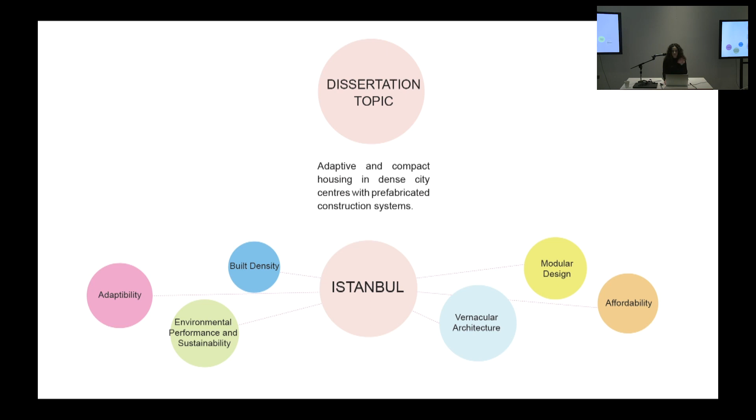Moving on to the climate, the project is located in Istanbul, Turkey. It is one of the densest cities in Turkey, close to 16 million population. Istanbul has a transitional climate between a temperate Mediterranean climate and a temperate oceanic climate, with warm to hot, moderately dry summers and cool to cold, wet winters.

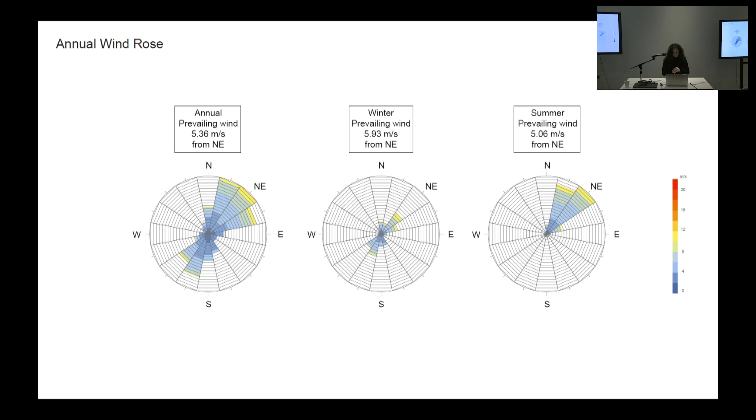Throughout the year, wind speed and direction are consistent. The dominant wind direction is northeast all year. The frequent wind velocity is about 5.3 meters per second with 25% frequency.

So this section will be summarizing the evolution from early settlements to today's housing condition, and some of the problematic aspects and what is being lost in this process. So before immigrating to Anatolia in the 11th century, Turks lived mostly a nomadic lifestyle in Middle Asia, which means that temporality was the main principle in the early settlements, and the spatial layout of the settlements had high mobility and adaptability to different uses, conditions, and occupants. So the tents were laid out separately, belonging to different units of the family and creating a central space in between.

And this converted to the vernacular timber houses. It's pretty much developed from inner space to outer space, just like the nomadic tent. And some of the important features, first of all, is, again, there's a common space where the rooms open up. This is used as a multi-purpose transitional space, and can also be interpreted as a square that connects all rooms. And wood is generally preferred for lightness, easy manufacture, and availability in the geography.

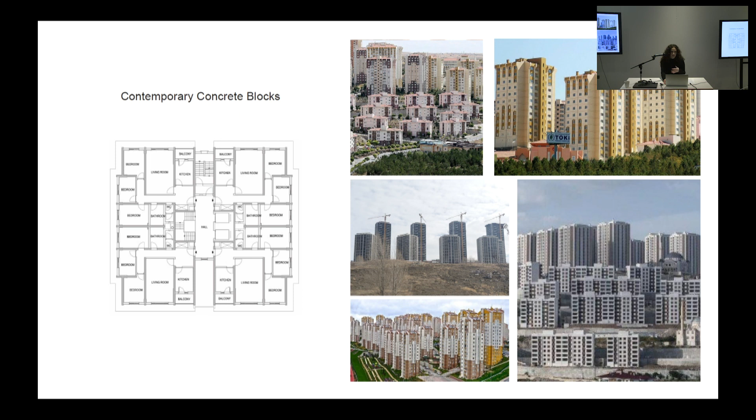So the design concept basically covers what is problematic in the current state and what can be improved. The living area mainly should come back to the center, and fewer isolated rooms should be formed. Vernacular elements should be integrated. There needs to be more attention given to the orientation and what's going on around with the obstructions, and a more compact design that also allows easy assembly and construction.

So the ideal module brings together all the main design concept and environmental concept ideas. It is very compact and only provides essential facilities. With the addition of the bay window space, it's 35 square meters. The living room and the kitchen come back to the center, and other functions surround the center. The separation between the different functions of the spaces is flexible, and for double aspect units, openings can be provided in the bathrooms for daylight.

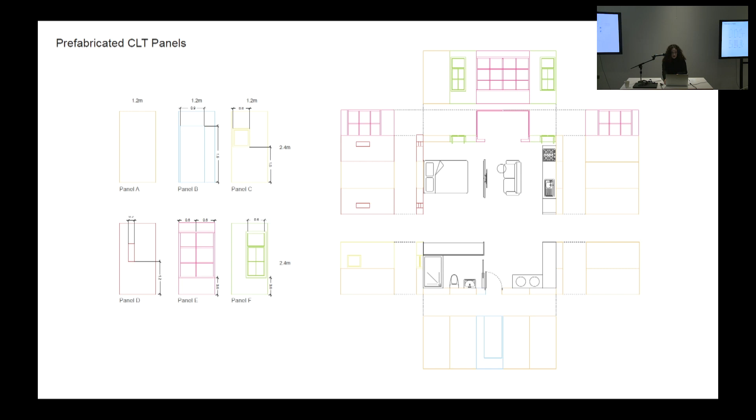The addition of the bay window is functionally quite beneficial for a very compact layout, but at the same time it can be used as multi-purpose, like a dining area, lounge area, or office. So the unit is constructed of 1.2 by 2.4 CLT panels. The different configurations of panels can provide different layouts. The main benefits of prefabricated construction are efficient, fast construction, and a high quality building envelope. And according to the transportation regulations, the module would consist of two parts, one including the bathroom and the other the living room, bedroom, and kitchen.

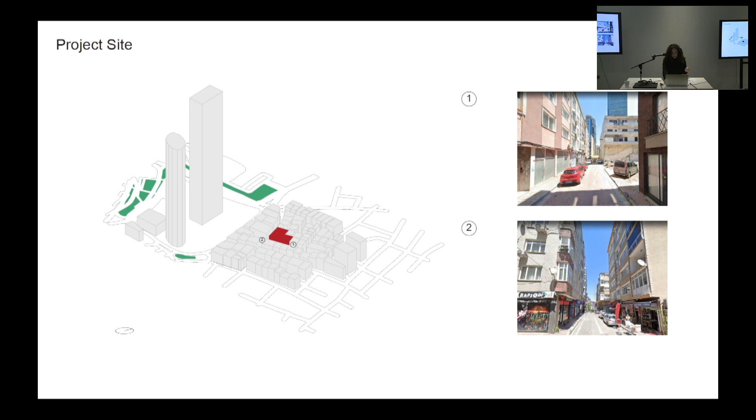So how these modules can come together. The project site is located in between the business center and a residential area called Levent in Istanbul. The surrounding buildings are in close proximity, about 4 meters, and the street is quite narrow. The residential buildings are 2 to 6 stories high, having small local shops around the ground floor.

The project site is rotated 19 degrees to the north-south axis. There are main roads to the north and east. The south and west sun would be blocked by the surrounding residential buildings, and the predominant wind is in the northeast direction. The road on the east side is busier than the road on the north. Therefore, the apartment entrance is placed on the north and retail spaces are placed on the east side. Considering the compactness of the module, there's also a storage space given to the residents on the ground floor.

Moving on, the massing study reflects the site analysis. First, the massing is offset from the streets to create adequate spaces because these facades also have windows. The retail, lobby and storage space are placed on the ground floor and modules are stacked on top. The common spaces are strategically placed in between the modules on the north and east facade, with the core and circulation supporting these spaces. As you can see, the modules are oriented east and north where the main roads are, due to the limitations on the west and south facade and the close proximity of the buildings.

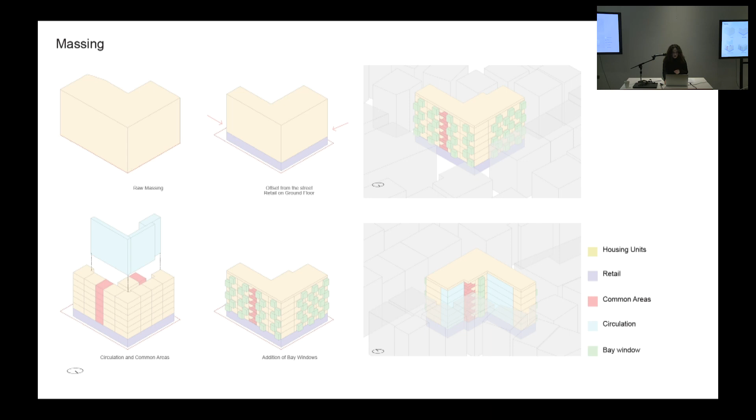So it will be built with stud wall construction, where the bathroom units and room units will be delivered and stacked together, and the bay windows would then be added. The roof, facade and circulation would be built on site. Again, the units are mainly oriented to main roads where they can also benefit from solar gains. Coupling the units in the north is important, and the common spaces were integrated conceptually as the transitional central space. Also, given the compactness of the units and the occupants being students or young professionals, it's important to have these areas.

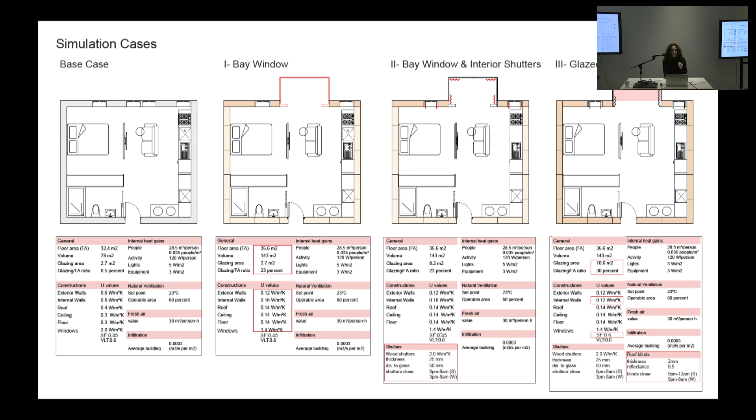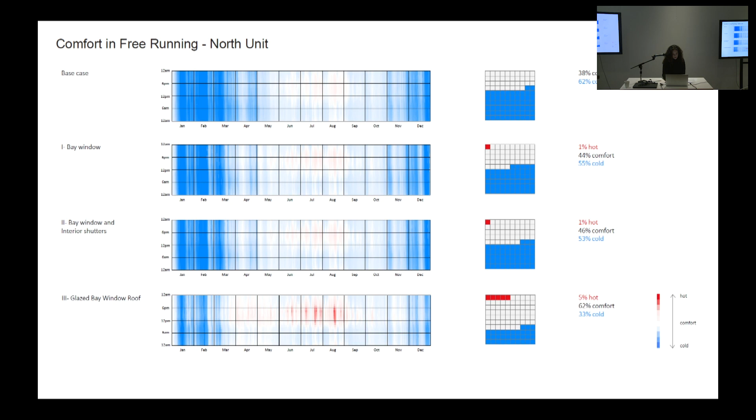The thermal comfort in free running mode for North unit is increased 6% by only the addition of the bay window, and the addition of interior shutters and the glazed roof in total increases the comfort hours 24%. Overall, the primary concern is the winter period, when the operative temperature of both East and North units ranges slightly below the comfort band. It is seen that the addition of bay windows is efficient for both orientations.

So the heating demand, looking at the cold period, from base case to the last tried case, for north it decreased from 25 to 13, and for east it decreases from 24 kilowatt hours to 11.

Daylight studies are run for 2 different targets for different spaces, 300 lux for living spaces and 100 lux for circulation and bathroom. Due to the open and narrow floor plan and the addition of the bay window, living spaces reach the 300 lux target more than 50% of the time, and even the far back of the module receives 300 lux at least 30% of the time.

The circulation path receives daylight from common areas that open to balconies. The units that have double aspect reach the target around 50% of the time. However, it is lost for units that don't have the double aspect.

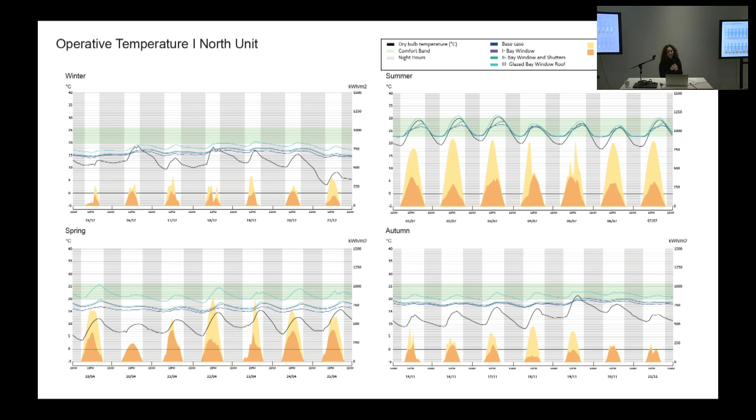Yes, thank you for your very clear presentation, Neva. It was very easy to follow, very well presented. I just have a couple of comments. On a very positive note, overall, I like very much the way the project embraced the challenge of contemporary density in housing design.

So I think it's really good to emphasize that, you know, the minimum square meters of usable space you're dealing with, how do you manage to fit all of that, is a big challenge, and we need more and more thinking on this. But then at the same time, you manage to keep some absolutely key environmental features, architectural features, the bay window, but also the so-called sofa, isn't it, that common area on the plan, that becomes a communal space. And I think that's a lovely gesture, because it's a change in lifestyle too.

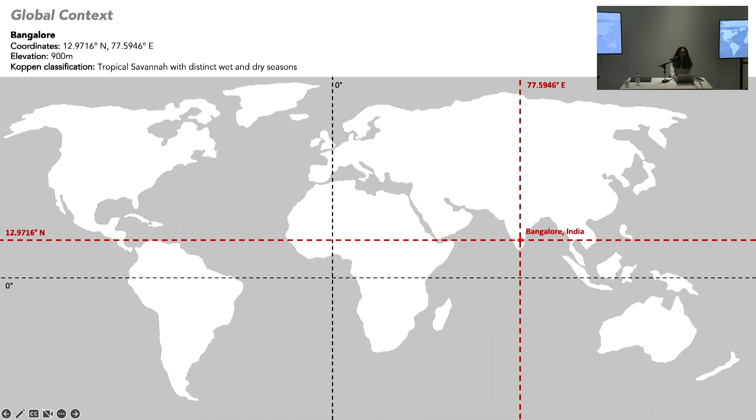Bangalore's always been a popular migrant hub, and the boom in the expansion of the city, however, came after the 2008 global recession with the increase in demand for office use. And the companies from the West outsourced their workforce to Bangalore, and this has snowballed over the past decade and a half to the growth of the city exceeding the municipal planning by an entire decade.

And the architecture of the office typology in Bangalore, however, has evolved from vernaculars and modernism towards a more globalized homogeneity over the past 3 to 4 decades, and the corresponding evolution in the organization of the workspace has been a more positive outcome that has evolved from cellular offices to a more flexible and hybrid mode of working. And again, the office typology has evolved and adapted itself to the post-pandemic working environment.

So that homogeneity has then resulted in this prevalent glass box office typology, especially in Bangalore, which is based on the Western notions of sophistication, and especially because these companies' parent companies are from the West. The architecture tries to mimic those architectural features, and the concern from design, which is the lack of response to context, translates to an environmental problem where design is in conflict with its climate. The glass box makes up a significant building stock in Bangalore, and hence demands a more critical look at improving the existing building stock rather than building new.

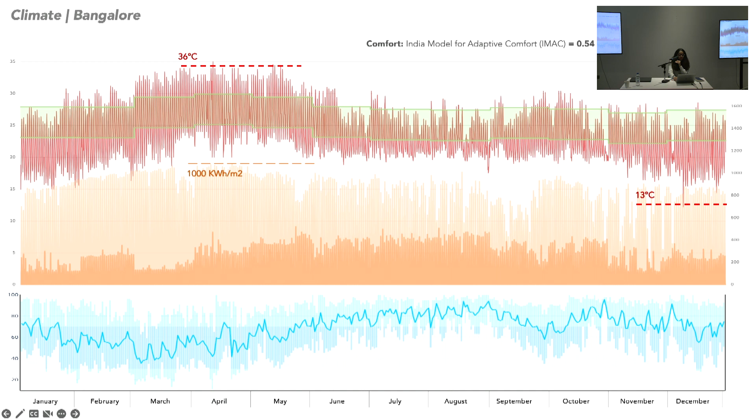The climate of Bangalore is famously known for its favorable nature, and the peaks in the summers are at 36 degrees, and the lowest temperature is at a mild 13 degrees. The high incident radiation prevails throughout the year, even with the winters having a significantly high radiation. This divides the climate of the city into broad seasons of summer, pre-monsoon, monsoon, and winter that are characterized by their diurnal ranges. Especially in the summer, we have a really high diurnal range, with the range being over 15 degrees and characterized by high dry bulb temperature and low humidity. And the pre-monsoon has a warmer daytime temperature but is high in humidity, which then brings in the monsoon with high precipitation and continues that humidity throughout the monsoon months. The winter temperatures are mild during the day, but the nights can get a little cold.

Keeping the context of the city and the climate and the typology in mind, the retrofit is based on one such office typology, which is characterized by the mid-rise deep plan features. So the building that is of interest for me, that then serves as the site for the retrofit, is situated in a tech park. It's a corporate office for a financial corporation. The intended use of the building was meant to look like this in the elevation, with its clear glazing and transparent outward-looking working environment. But because of the lack of foresight, the usage now has become a more inward-looking environment, with blinds making the facade opaque both from the outside as well as the inside.

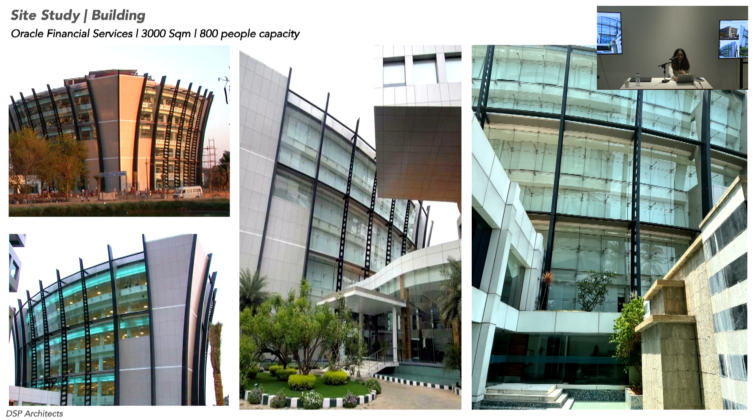Then this translates to the internal working environment, where this again was the intention, with favorable views towards the lakefront, and how the glazing was supposed to act in bringing a connection to the outside. However, it is now a very closed, opaque, inward-looking environment, with its daylighting being very poor and a dependence on artificial lighting. Also, the glass box is characterized by its lack of natural ventilation because it is a sealed envelope, and the dependence on mechanical cooling is year-round.

So then, just to summarize what the usage of the building is like, the density is designed for about 800 workstations, but post the pandemic it is only in use for about 50% of the occupants at a time. And therefore, the resulting density is about 4 to 6 square meters per person, with high equipment loads because of the density, as well as lighting loads because there is a dependency during the day as well. And the construction is largely conventional, with the structure of the building being concrete and the glazing as a secondary skin being single glazed.

Just to understand how the building performs, a data logger was installed for a summer week, and you can see that the AC set point was at 26 degrees, but the building performs, even at the middle of the space, about 3 to 4 degrees above the set point temperature, which indicates an inefficient envelope as well as high demands for cooling loads.

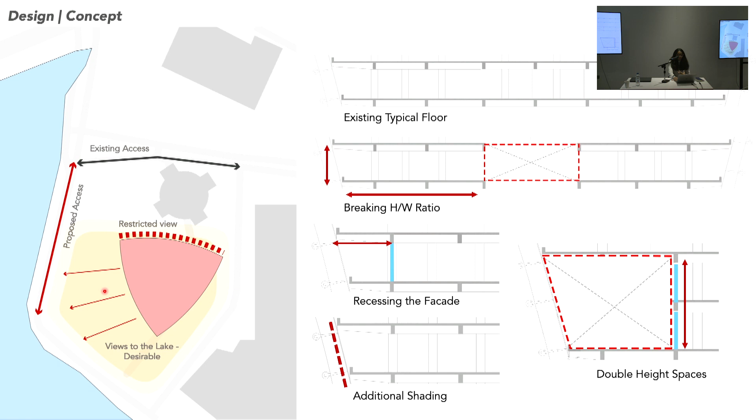Then for these strategies, analysis was conducted in the dissertation over the 4 periods that were outlined at the beginning. But for this presentation, I am dealing with the worst condition, the hot and dry, which is characterized by its high dry bulb temperature, high radiation, and low humidity. And the strategies that would be required for comfort in this climate would be high thermal mass, an appropriate window to wall ratio to limit solar gain, but also maximized natural ventilation. Night flushing was of interest as well, because a large portion of the night time is in comfort, and solar control, of course, to limit the radiation.

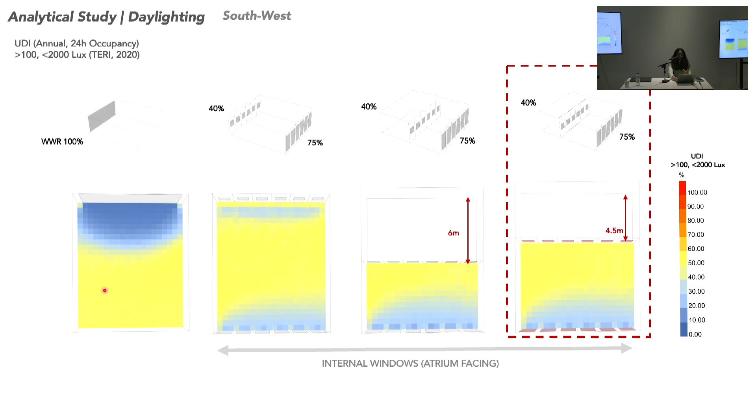A shoeboxing study was then considered for 2 orientations, the southeast and the southwest, because it's a triangle. In the southeast, the base case of the fully glazed building was iterated upon with suitable window to wall ratios and cross ventilation potential to ascertain what the depth of the recession from the facade would need to be for both the southeast and the southwest. Interestingly, because of the low latitude, the southeast and southwest were more or less symmetrical in the depth of the overhang that was achieved from the facade being recessed. Translating these properties into thermal comfort would then be investigated for different optimization strategies.

So for thermal comfort, the workstation density was modified based on post-COVID regulations of 10 square meters per person, which meant that the resultant occupancy would almost become half of what we started with. But the hypothesis then was that if we are de-densifying the daytime, could the nighttime be used to increase the number of people using the space over the day with the same building requirement. So the equipment loads and lighting loads followed based on that, and ventilation was maximized based on office regulations. The structure remained the same, being concrete. The external walls were tested with rammed earth for high thermal mass, and the single glazing was retained from the deconstructed skin that we had earlier.

So I'm just trying to summarize a brief account of how the thermal comfort iterations were done, with the first case being the existing construction, but if it were to be in a free-running case with zero natural ventilation and without its mechanical cooling, then the peaks are going as high as 55 degrees. Of course, this is slightly exaggerated because it is a shoebox, but it can be expected to perform more or less similar to this. The working conditions remain true to what the existing conditions are at 9 to 5 p.m. occupancy and 5 meters square per person.

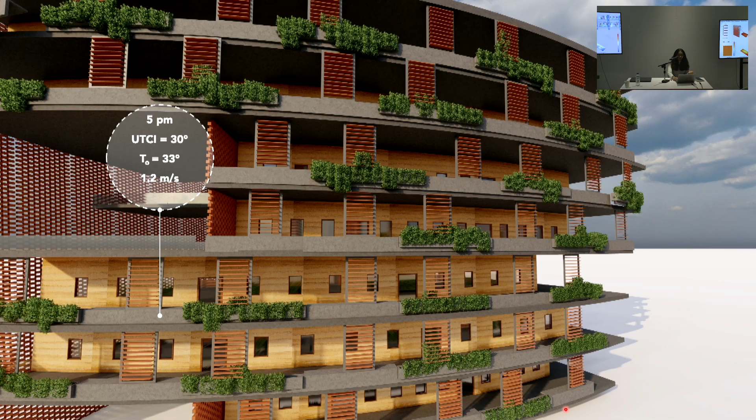And the impact of that device was then looked at on the internal space to see if it was causing any adverse effect on the daylighting, and then the impact on incident radiation on the work plane of the outdoor space. And the cases here are looked at with only the overhang, which was formed because of the recessed facade, and then the addition of the vertical shading and what the impact of that is. And because they're adaptable and the occupant can slide it, it would vary across the depth of the workspace based on where the occupant was. And then the resultant UTCI on the facade was about a delta of 3 degrees in the worst period of that day.

So based on this analytical work, a flexible planning strategy was then made by designing for the 3 environments that were discussed earlier, the inside, the semi-outdoor, and the outside. In this slide, we're looking at the indoor environment. Because it's a flexible co-working space, the different proposed occupant groups are looked at in terms of single working, smaller groups, larger groups, and social spaces. And similar density is achieved in the semi-outdoor space so that the occupant can couple. Basically to say that the outdoor space is not an additional working environment, but it's a spill-out space from the density achieved with the inside.

So with this planning, how the space works in the 24 hours is then looked at here. So in the time slice for that day, between early morning and mid-afternoon, when the operative temperatures are in comfort, the occupant can basically work throughout the 3 working environments. So the workspace is coupled with the outdoor, and natural ventilation is in place, so all 3 environments are comfortable.

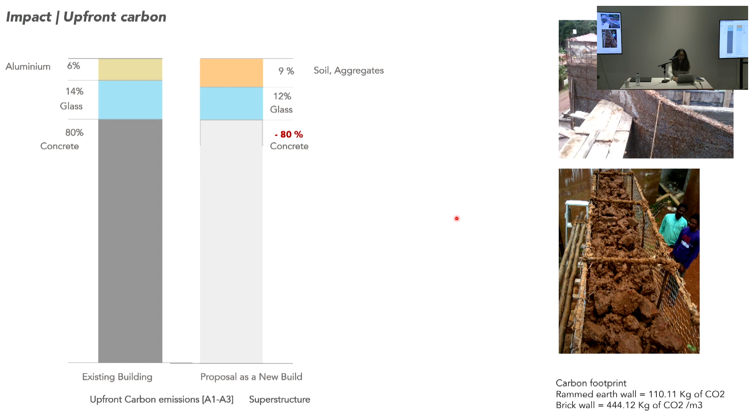And then the consequence on operational carbon is that the whole cooling demand is completely eliminated from the building, but there is some increase in lighting and equipment demand because of the 24-hour workspace. But the cooling demand is 75% of the energy demands of the space, and that's eliminated entirely. Just leaving you with a visual of the space. Thank you.

Thank you, Anagha. Who wants to start? Joanna? Thank you, Paula. Maybe I can say a few words. Thank you, Anagha, for your presentation and clear visuals of the project. I'm going to be very brief. I think your project is responding to a super urgent need, which is the retrofit of these buildings, which are reasonably new buildings now. So very well picked.

Reflecting on everything you presented, I would just take one step back, and I think there is a little story missing that you are addressing technically, but in terms of design approach, it justifies the design approach. What I missed in your presentation is a small intro on the importance of semi-open and outdoor spaces in the new working cultures of today. You are not retrofitting a building for the same office activities that were there 10 or 20 years ago. We work in new ways now.

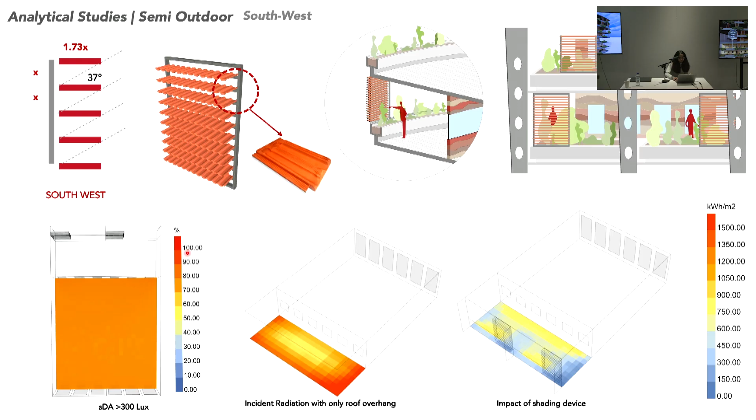Cooling down that mass at night depends very much on the temperature at night outside. Since I come from Indonesia, I wonder if in Bangalore it's quite the same. The temperature doesn't vary that much. So I was wondering first, what was the potential for night flush ventilation in Bangalore? The potential is largely in the hot periods because the diurnal swing is over 15 degrees. So that was the potential to incorporate it, but it doesn't translate throughout the year because it's obviously necessary only in the hotter parts of the year.

Okay. Thank you. I was also wondering, because all these buildings are these glazed buildings in India, a lot that we see also in Indonesia or in other parts of the world. There's somehow a misled idea of progress where people want to mimic a behavior that is not very local in a way. The idea of a building post-COVID, an office building where people would adapt instead of pressing on a button, I'm sure you've thought about that, how it happens.

And it would have been good to hear a description of how going to the office in such a building would be, and at different times of the day, or I don't know if the monsoon changes a lot of things. But then, say I'm in a meeting room, can I have it in the semi-outdoor? Should I have it at the center of the plan? Or is the periphery of the plan reserved for more permanent positions or temporary positions?

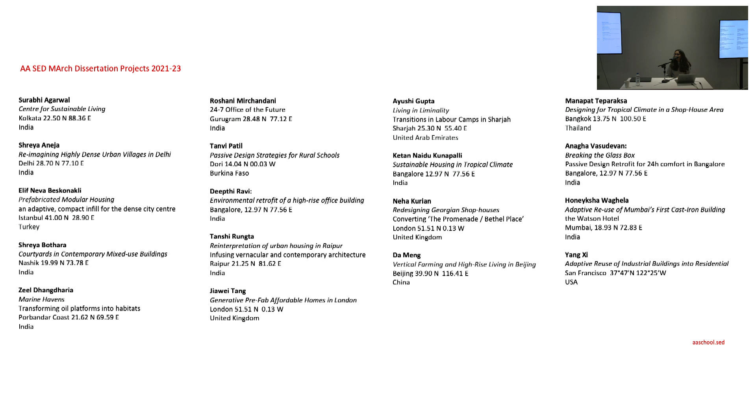Thank you, Florentia. I have little to add. I think it was a very good presentation, and I think you were quite courageous in choosing this topic. Because it's really complex, and there are lots of issues to tackle. And I'm sure if you would have more time, you would be able to tackle them within the same depth.

However, I think it was a very clear presentation, and it demonstrated how you used the SED methodology and the tools available to improve certain things. You were very clear from the beginning what are the main problems, and also what were your objectives, and then at the end also showing the reduction in carbon, operational and embodied. And well done. Thank you.

We have 3 presenters now. We're going to go in a row until just before 6, hopefully. So we will start the second part of the afternoon with Jiawei, who is going to talk to us about his project on affordable housing in London. 15 minutes, Jai.

Okay. Yeah? That's okay. Could I start? Is it working? Can you tell us? Hello? Oh, yes.

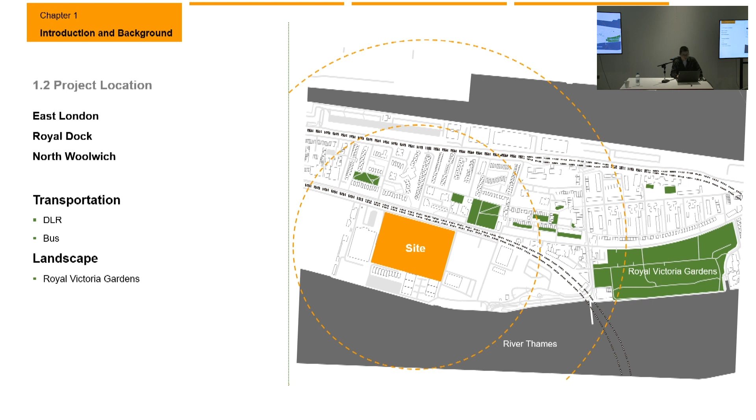For the site transportation, we can see that there are DLR stations and bus stations within 10 minutes walking distance. For landscapes, there is the Royal Victoria Gardens, also within a 10 minute walk. But for amenities, there are few restaurants and stores. For the climate context, in winter most of the time is out of the comfort band. And in summer, there are several days also out of the comfort band because of the overheating problem.

But in the future, this kind of hot summer may become the usual situation. So this is also what I need to be concerned about.

And for my house type, the prefabricated house is always the first choice for the affordable house program or the social house program. From Le Corbusier's Dom-ino to the Y-Cube from Rogers, they are all using prefabricated technology, which could be quickly assembled and relatively affordable, and it is also low carbon emission and easy to recycle.

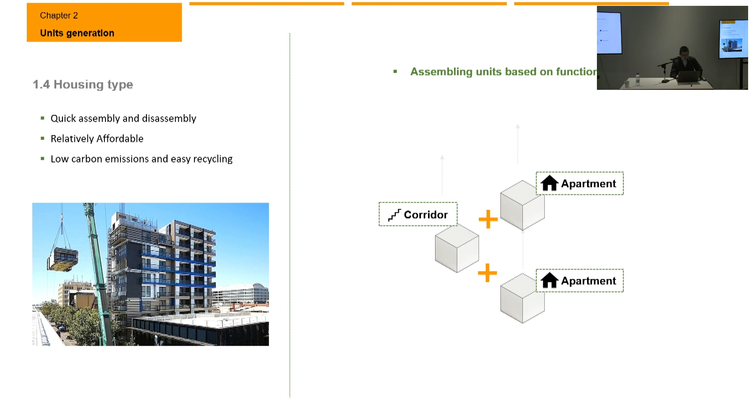And for many prefabricated houses, the units are just stacked together like the photos showing on screen. And inspired by Habitat 67 by Safdie, I'm starting to think why we always need these box-like blocks. Could we have a flexible plan? And could we also design this kind of modular house based on environmental parameters, like daylight, temperature, and ventilation?

So for this design, I will focus on how to generate prefabricated modules based on environmental parameters, like the illuminance and direct sun hours. So for the second part, the units generation. According to the regulation in London, the interior area of the dwelling is related to the number of bedrooms. So for my flats, I will design 20 to 28 square meters per person, and I will design 1 bedroom, 2 bedroom, and 3 bedroom flats.

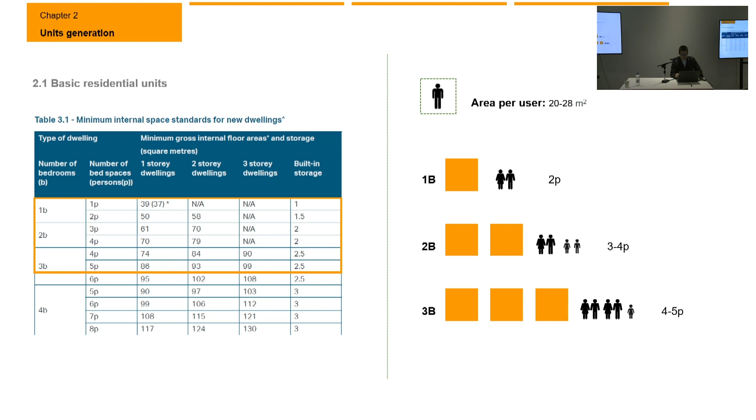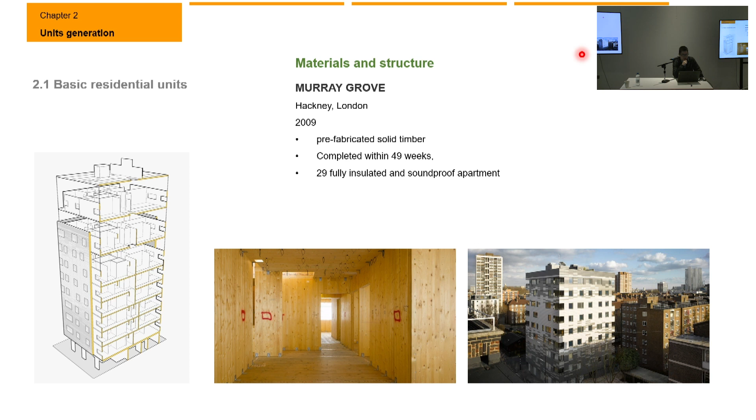Then for the material and the structure of my flat, I'm doing a case study on Murray Grove, which is a prefabricated house consisting of solid timber, and it was completed within 49 weeks. So my material selection will also be the timber prefab structure, because it has good sound insulation. Because my site is quite close to London City Airport, sound insulation is a very important point. And timber also has good thermal insulation.

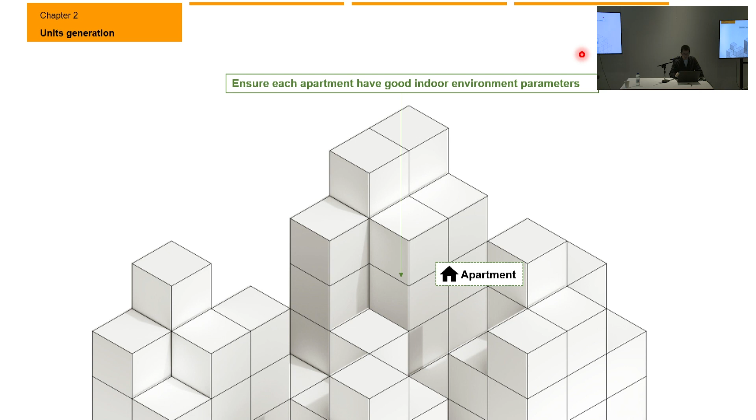Yes. So before the flats combine together to become the whole building, the first question I need to solve is ensuring each apartment has good interior parameters. The objective is to make sure every room's sDA is more than 50% at 300 lux, and all the rooms are in the comfort band. And to improve these two objectives, I have three methods: change the floor plans, add extra windows, and add solar control.

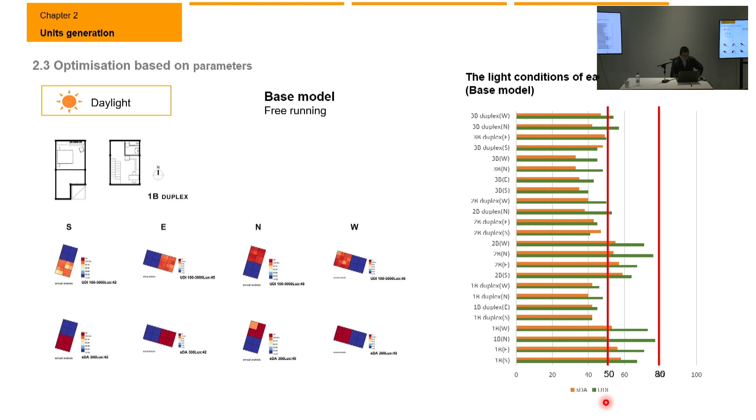So first, I'm doing the simulation on the base model with free running, which is no cooling and no heating. And for the light condition, I do simulations of 4 orientations. The result is on the right side. And these are the results of 6 different types of my flats. We can see in the results that the light condition is not so good for the base model. Many flats' sDA is lower than 50%.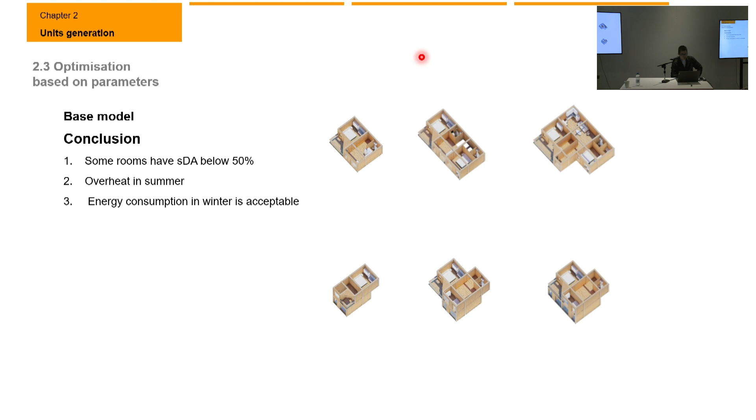So the conclusion of the base model is that some rooms' sDA is below 50%, and there is an overheating problem in summer, but the energy consumption in winter is acceptable. So I need to solve these first 2 problems. First, I change the floor plan.

For example, this is a 1-bedroom duplex flat, and I remove these walls to let the sunlight come inside, because the wall blocks all of the sunlight, so the bedroom behind doesn't have enough sunlight. So removing some of the walls will improve the light condition. And I also add the extra window to help more light come inside, and also help the natural ventilation. And then I also add solar control to block some of the solar radiation in the summertime.

So the result of the improved model, we can see that in every 6 flats, the sDA is more than 50%. And the percentage of time in the comfort band is all around 92% to 96%, so it's quite good.

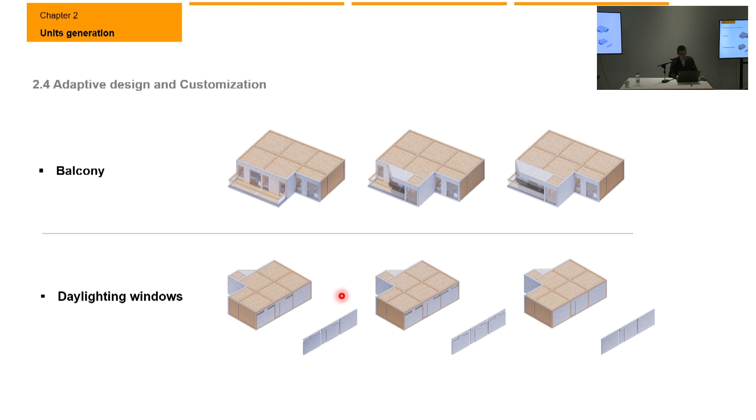I also have some adaptive design for my flat, which means the users can choose some of the elements, like the balcony. I have 3 options for them, and they also can choose whether they want the extra windows. Because some of the room types don't have this kind of light problem. They have enough daylight, so they can choose whether they want extra windows. And they also can change their floor plans.

And another thing for my modular flats is that after use for maybe several decades, it's easy to repair and recycle because it's all modular timber slabs.

And chapter 3 is the estate formation. Now we have the units with good interior environmental parameters. So the second question we need to solve is how to ensure the apartments won't interfere with other apartments when they combine together. So I do the analysis in 2 aspects, which are the light blockage and the exposed envelope.

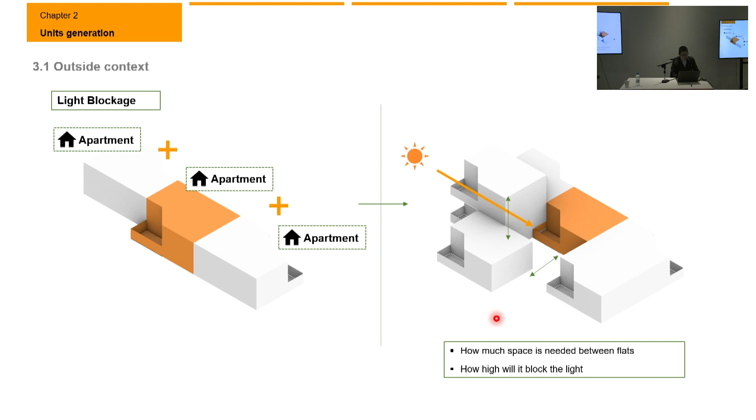First, when we just combine these flats together, some of the flats may block the sunlight from others. So I need to figure out how much space is needed between these flats and how high it can be before it will block others' daylight. So doing the analysis on this, the result is that we need at least 4 to 8 meters void between two flats, and the maximum height of the outside context will be 7 meters, which is about 2 floors.

And another thing is the exposed envelope. This is one of our flats, and one side faces the corridor, one side faces the outside. And there are 4 other sides which may be connected to the other units, or it may be just a void. So I need to determine how much area of the envelope could be exposed.

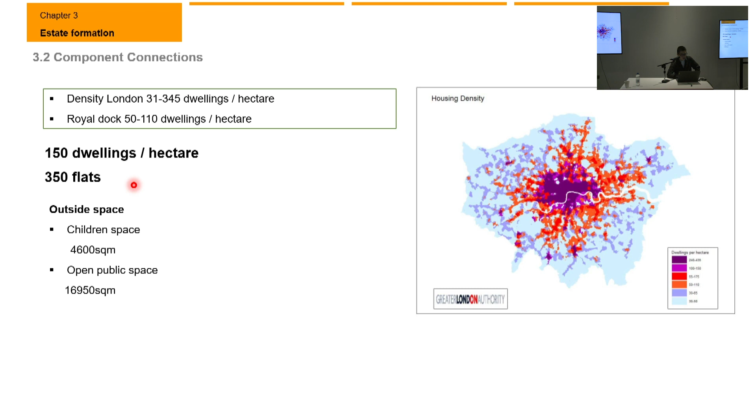Then the third question of the whole estate is how many apartments and other areas do we need? For the housing density in London, it's about 31 to 345 dwellings per hectare, and for the area of Royal Docks it's 50 to 110 dwellings per hectare. So I selected my density as 150 dwellings per hectare. It's about 350 flats.

And I also designed the outside space for the adults and children. The outside space consists of outside components like the platform and corner terrace, and they will combine, connected to the flat modules, and generate the whole estate. And these are the quantities of different components.

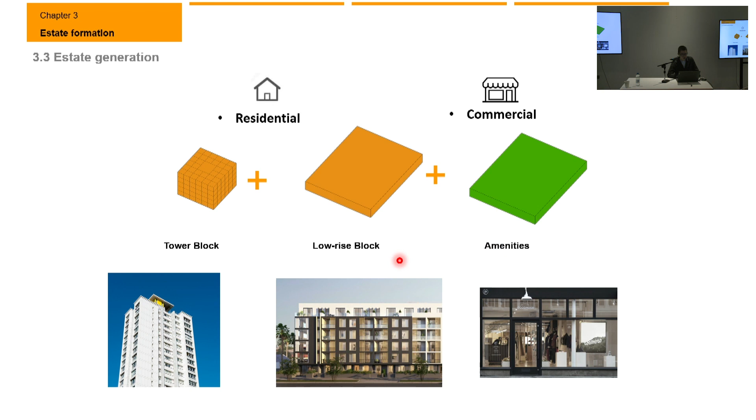So for the whole estate, we'll have 3 areas, which are the tower block, the low-rise block and amenities. The tower block will be located at the top. It will be about 5 floors, and then the low-rise block will occupy 2 floors, and the amenities will be at the bottom. It will have 2 floors.

And for the tower blocks, we will have a core in the center of the tower blocks, and the flats are around the core, and there are elevators and stairs in the core. So each core will be connected to approximately maybe 8 flats per floor. So we'll have 5 cores for the whole estate.

Yes. Oh, I will go through faster. Okay, sure.

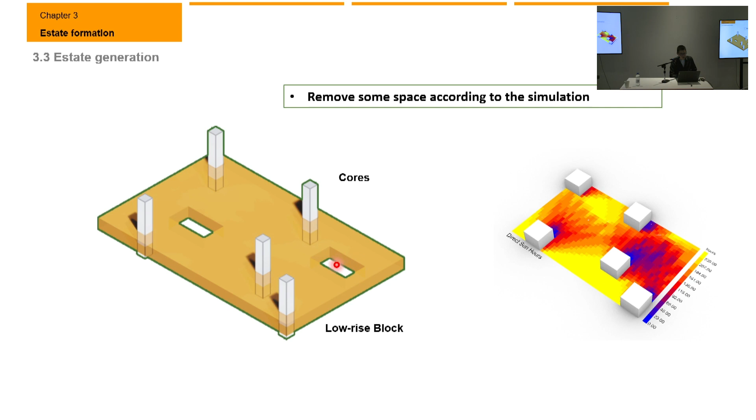So the first thing is I need to determine the location of the tower blocks. So I do the daylight simulation. Because the tower block is on the top, it will affect the other levels. So I find out the best location of the tower blocks, which have the least effect on the other low-rise blocks. So these are the corner locations. And because some of the parts still have very bad light conditions, I reduce this space from the whole boundaries, which means these two voids will not generate any units.

Then I first generate the low-level blocks, and I also do the simulation of every room. Then I generate the tower blocks. These are the final residential part of my estate. Then I also add the levels. So this is the final rendering of my whole estate. Thank you. That's all. Thank you.

No. Sorry. It's my fault. Sorry. It's working, yeah. But half, maybe?

Thank you, Joey, for the presentation. You have a very interesting approach, a very different approach. I think the presentation was very clear in all the graphics, how you have explained to us, how you have taken us through this very complex and very technological approach. So that's commendable, because otherwise I think it would have been much harder to follow all the iterations and all the studies that you have done.

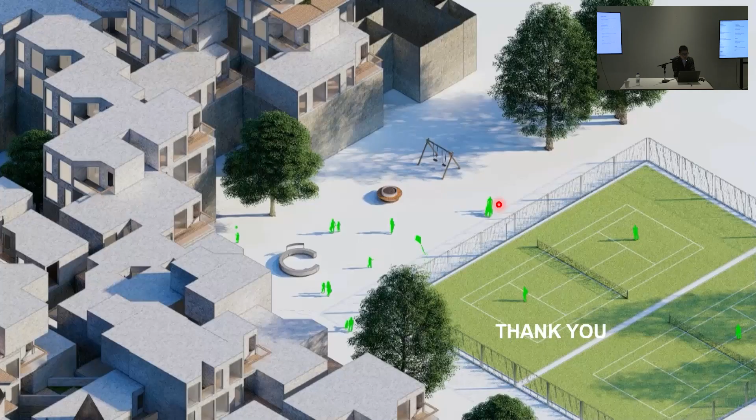Especially when we see the result of your optimization process at the end, where we see all these boxes stacked. We can see the amount of exposed area. It's a very porous design. There's a lot of exposed surface, right? Yes, yes. So we're just wondering, how do you optimize the heated envelope? We want to see how you resolve those issues, because otherwise there's a lot of heat loss, even though they're opaque surfaces.

And also in between all of this, I would have liked to see the circulation areas. How are these units connected? Because they are individual units or double units, but then is there a common area, a shared area, circulation areas, and how do you lay out the plan according to orientation, maybe, something like that. But those were the comments. I hope they're helpful.

Yes, thank you. Thank you.

I thought the visual presentation is excellent, and you should continue working in this way in terms of showing things. My problem is with the things you're showing. There is a problem there. In terms of research and in terms of affordable, I think it was pointed out there is no definition of affordable that you have given. I liked the approximation somewhere. I think I saw you said relatively affordable. Yeah, I think that is really smart, because in the case of London, it is the only thing that can be said.

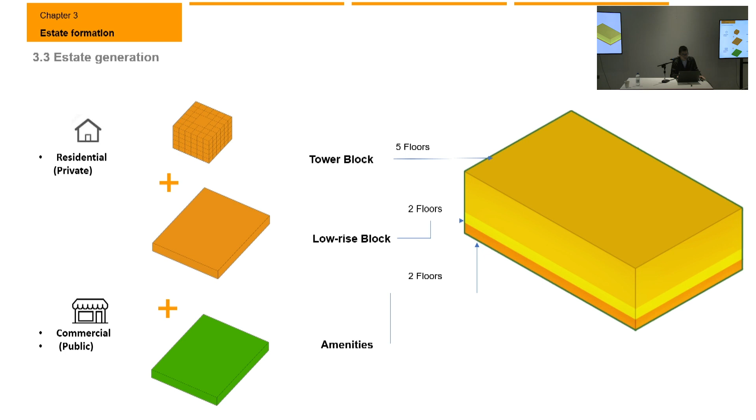I do have one quick question. In the first parametric generative process, what is being varied there? Is it orientation? The first one, not when you put it into context, but when you have only the plans. Before that, the very first parametrization. Are you testing the orientations? The interior one or the whole estate? When you tested the individual units, the very first generative exercise, is it orientation that is varying? Yes, this one. It's orientation. Yes, it's for orientations.

Okay, because in that process the generative script maybe helps you do it a bit quicker, but you don't need a parameterized model like that for this, no? That's what we normally do, just turning the model. Is that correct? Yes, just turn the models around and then do the simulation. Okay, because the point is, we are making adjustments to make it maybe not more efficient, but more logical or convincing or even contextual, and even tuning some of the performative aspects of it.

I'm afraid I'm not being too clear, but the point is, at what point do you stop the generative process and come with a new approach where you look at it, adjust it, and that's the final product? Because I understood this is a result of the optimization, correct? Actually, my script just generated maybe 50 results. Then I selected one of them. And you selected based on some criteria? Manually, I just thought maybe this space could be a playground, and this space has better views. So I just selected manually.

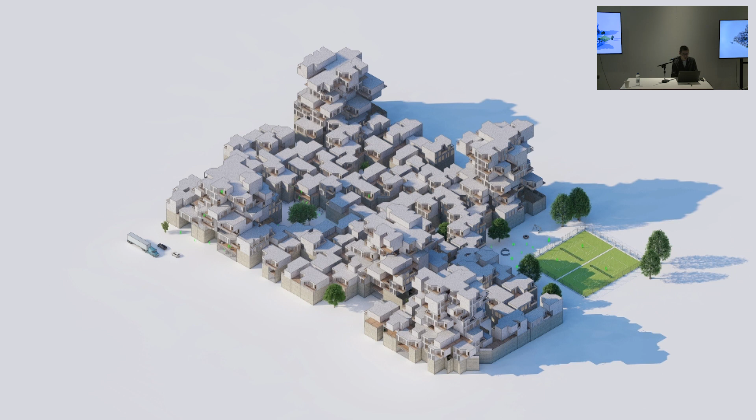Thank you, Jaiva. I agree that it was a very good presentation, and thank you for not exceeding the 15 minutes too much, because a few days ago you had 85 slides. Yes, I reduced many of them. And I'm sure that many of the things said here you have considered, like the LETI standards and the illuminance levels, or comparisons with the book where the SED case studies are. But of course you had to select some of the slides.

Nevertheless, the comments you got here were very useful, because it's how you need to tell your story in the book, maybe only shuffling things and highlighting. Taking this last comment from Joanna, it's about the environmental criteria, but you manipulated a lot during the process, changing your script during your work to include architectural criteria as well. This was not very clear today, so maybe you need to highlight those. But thank you very much. It was an entertaining presentation. Thank you.

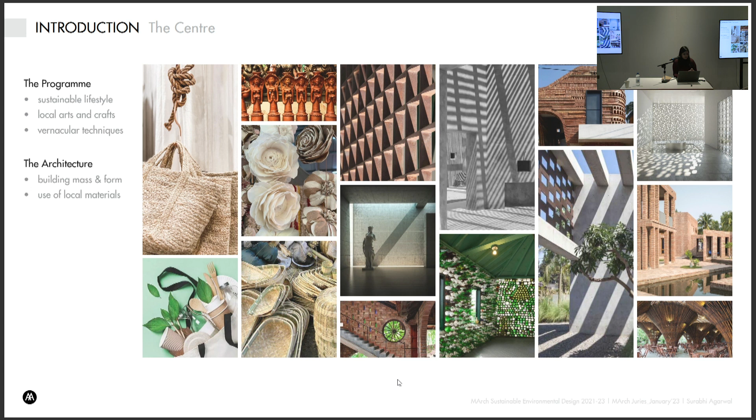From the architecture, through the building mass and form and use of local materials, the idea is to teach the inhabitants through the architecture. In terms of the design approach to the dissertation, the idea was to focus on providing 3 types of learning spaces essentially. First was the direct learning space, then the applied learning space, and finally an interpersonal learning space. The eventual goal was to provide thermal and visual comfort to these spaces, as well as thermal and visual delight. So when I say comfort, I mean being inside the comfort band for a particular comfort model. And when I speak of delight, it's focusing more on the experiential aspect of design.

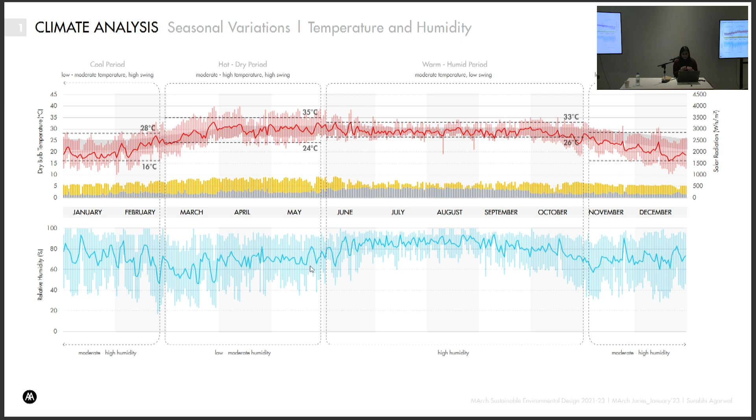Okay, yes. So just providing a little bit of the context of where the site is located. It's situated in the city of Kolkata, which is 22.655 degrees north, very close to the Tropic of Cancer. And zooming in a little bit, the site is further located in a park called the Eco Park in the city. Moving on to the climate analysis of the place. Broadly, the climate can be divided into 3 major seasons. First is the hot, dry period, which has moderate to very high temperatures during the day and higher swings. The second is the warm, humid period, where the temperatures are moderate all along, but the swing is really low, giving very high relative humidity of approximately 85% on average. And then a cool period where temperatures are moderate and the swing is a little higher.

So to summarize, it can be broadly divided into the hot period and the cold period. And the hot period can be further broken down into 2 distinct ones, the hot, dry, and the warm, humid. And as we know, the strategies undertaken to achieve comfort for these 2 periods can be quite different. And therefore, it was important to explore these through analytical work and what are the strategies that really work for the climate. But before that, I would just like to show some visuals of what the vernacular of the place had versus what the contemporary city now looks like.

So moving on to the analytical work, and deriving from this, a methodology was formulated. The first step of the methodology was establishing a base case, which came directly from what the current contemporary standards are for building. Step 2 was design optimization, which looked at reducing solar gains through optimizing orientation, shading, and window-to-wall ratios, and providing natural ventilation. Next step was elemental optimization, which looked at the envelope as a whole and therefore studied optimizing materials of roof, floor, and wall.

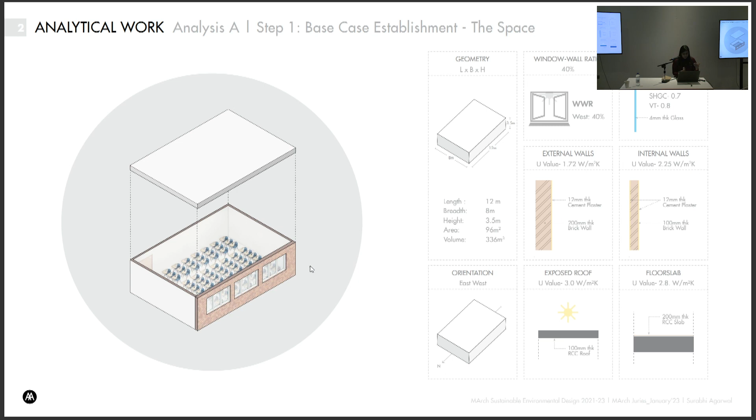So speaking of establishing the base case, it's a 12 by 8 meter space, and like I mentioned, the construction is of the contemporary standard with an RCC floor and roof and brick walls. Next is moving on to the establishment of the various densities. So I took the 3 types of learning spaces that I spoke about initially, and they each had different varying densities and corresponding loads to them.

So for the case of analytical work, I took the highest density, which is case 1 of a classroom. And it was analyzed for a base case where the orientation is east-west. There's no shading provided at the moment, no natural ventilation considered for now, and the window-to-wall ratio is an opening facing west with a 40% opening. And it was plotted for 3 typical days, picking each from 3 periods.

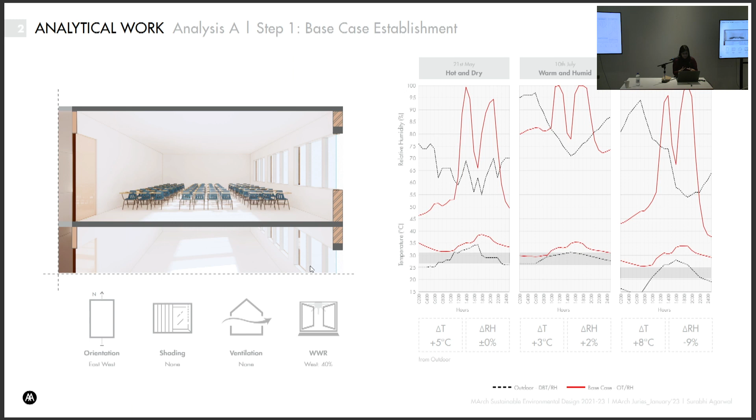And further on, I spoke about how optimizing the envelope was necessary, and therefore the floor and walls were changed to rammed earth, taking from the aspects of mass that we just saw in the vernacular image, and the roof, which is a double roof situation where I took a filler slab with an added extra double roof. And this further led to a drop of approximately minus 6 degrees Celsius across the year.

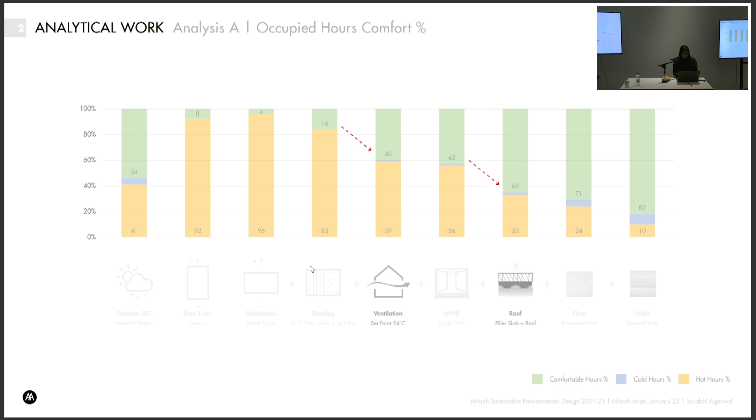Like I mentioned about density, in this particular case, it was observed that the varying densities did not show much of an impact on the comfort itself, and this could probably be attributed to how the space is naturally ventilated, neutralizing the gains. And moving on, the outdoor setup was such that it was adjacent to a veranda space and then the courtyard space. So these were the two major aspects that were studied.

And UTCI studies were carried out for the verandas, and post carrying out shading studies, it was observed that with optimal shading approximately 60% comfort could be achieved for east-west facing verandas as well as north-south facing verandas across the year for occupied hours.

Also, the courtyards were studied for wind. As I mentioned, humidity is an issue in the area. Therefore, wind velocities were important at pedestrian level. So an enclosed courtyard versus a single open versus a double open courtyard were tested, and the wind velocities, as expected, did seem to improve in these cases. And taking from the analytical work, a form was developed for the project.

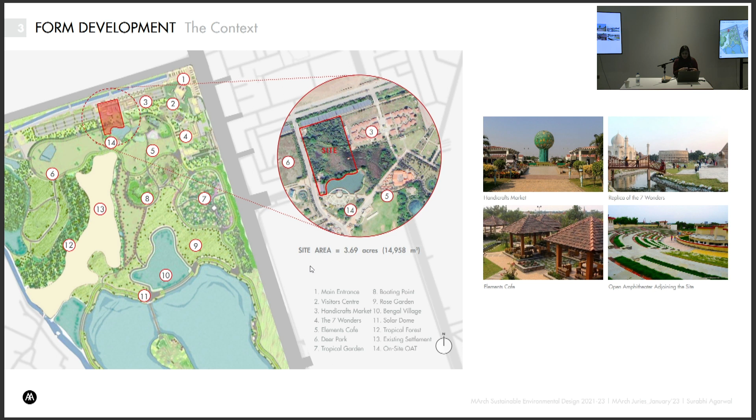But before I get into that, I would just like to place a little more about the context of where my site is. So it's located in a park, like I mentioned, and the park itself has a number of different activities going on around it in the form of handicrafts market, a cafe, amphitheaters, different museums, etc.

And now, developing on that, the program was derived for the 3 learning spaces. So the space tested of 12 by 8 meters was directly taken here and multiplied based on the requirement. And in terms of organization of each of these, the direct learning space was imagined to be a little more formal and organized, whereas the applied learning was more organic, clustered with niches and breakout spaces. Interpersonal learning was imagined to be a mix of both with semi-formal spaces.

So just an overview of the site: the sun angles are really high, being in the tropics. The summer winds are from the south and the winter winds are from the north. For the zoning of the site, taking the spaces I just defined, I zoned them and left a big central green open to integrate with the bigger park area. And the orientation was north-south as we derived from the analytical work, and the south was left fairly open to allow the free flow of wind in the summers.

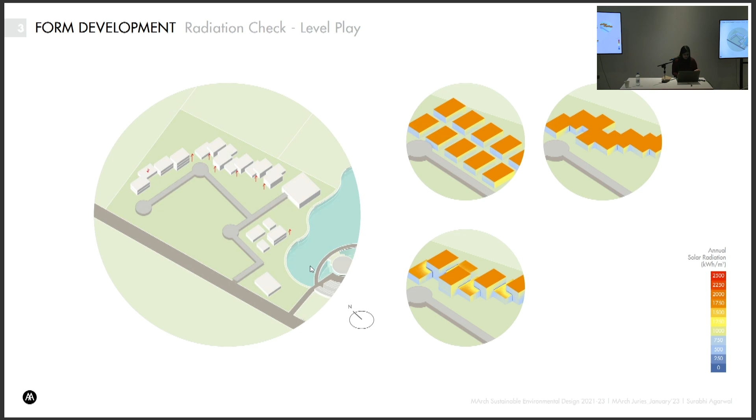A pedestrian circulation was added to connect these blocks, and then a series of steps were taken to reduce radiation on the envelope overall. So the first step was staggering it in plan. The next is staggering it in height to reduce it on the roof, and then further, as we had seen, adding an extra roof to further reduce the radiation on top. This was then added on with more pedestrian links to link all of the spaces, all of them being shaded. And then further smaller courtyards were inserted between the spaces to act as breakout spaces for these workshops.

Wind was tested; however, it's not surprising that the wind velocities were a lot lower in these courtyard spaces, and therefore chamfers were created in the wall, which led to an improved wind speed, as you can see here.

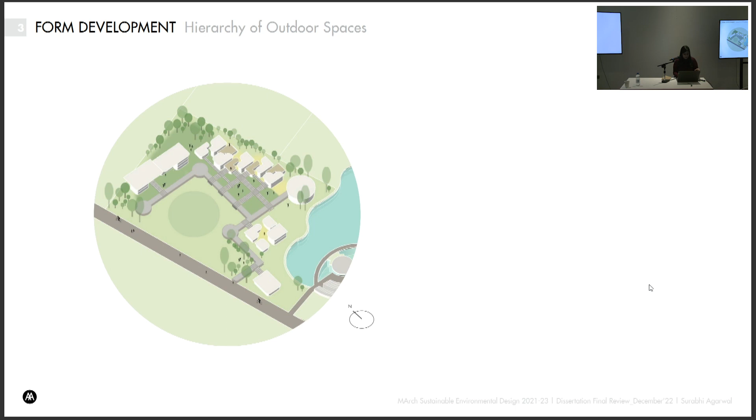And after this, a hierarchy of outdoor spaces could be derived: verandas and terraces; smaller courtyards, which would be more intimate courtyards for zone-specific activities; mid-sized courtyards, which would be spill-out spaces and could act as exhibit spaces as well; and large central courtyards, which were essentially a continuation of the existing eco-park. So deriving from the materials I arrived at after carrying out the analytical work, this is what the developed form looks like.

And now comfort studies were undertaken to understand where I am in terms of comfort after having gone through this design exercise. Firstly, the outdoor spaces were tested for UTCI to understand comfort, and they were plotted across the 3 typical days and for 4 different hours of the day. It was observed that during the warm, humid period, one could expect to be comfortable most times of the day, except the very high solar hours at 12. However, in the hot and dry period, only the evenings could be fairly comfortable at around 8. Whereas in the cool period, you could be outdoors almost all day.

So for testing the indoor spaces, one of the workshops was chosen as a test. On the right, you can see an exploded view of that workshop space, to understand how the space finally evolved to achieve the design goals. You can see these smaller niches which would facilitate smaller group activities in a hands-on workshop space. The idea was to provide each of these spaces with a shaded spill-out space in the form of smaller courtyards, verandas, or a terrace space. And what you see above is how the roof framework has been developed.

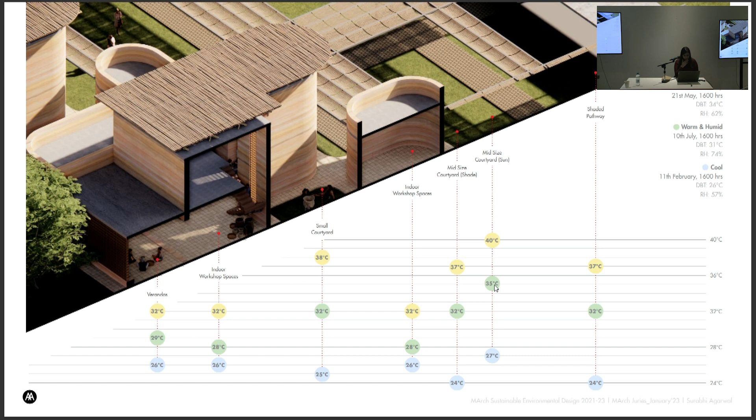That was the idea. And to understand that, I cut a section through the space to understand the indoor and the outdoor comfort at different days of the year. And this was taken for 4 o'clock in the evening. Just picking one of the cases for warm and humid, you can see that the temperature varies from outside to inside by about 3 to 4 degrees, as 35 degrees is hot in the sunny area, 32 in the shaded, and 28 in the indoor spaces.

Just to conclude, these are some of the visuals of how I'm envisioning the project. Finally, this is the visual of the mid-sized courtyard, the smaller courtyards, the indoor workshop spaces. This is a view of veranda breakout spaces from the classrooms. This is a view of the collaborative hub, which is the interpersonal learning spaces. And this is an interior view of the same. That's it. Thank you.

Oliver, would you like to? Can I give you? Okay.

Rammed earth is beautiful. Amazing presentation. It was very clear to follow your train of thought. I particularly like the amount of time you spent on the design thinking, studying the vernacular, all the lessons you took from that, and you spent a lot of time just thinking with those elements and moving forward. And then you started testing things, which I think is really pleasing to follow.

So now the Learning Center, obviously you detailed the different densities. There are a lot of constraints that I'm sure you're aware of, having this density inside those spaces in that climate. And you've chosen a certain number of solutions, such as the rammed earth, and you mentioned quickly the thermal inertia. There are a lot of considerations that you probably have in mind that you didn't necessarily point out, which I would have liked to know more about. That's all I'm saying.

And also, just one last comment. Was the wind scale inverted? Because you were showing the wind plans, and it seemed that.

You have some very nice images at the end of the project, and I had seen them before, but both before and now, seeing them again, they are a surprise, because in a way they come out of the blue, which is fantastic, you know, but we also want to be able to connect things, and we have these end images, and we have a process that included analytical work.

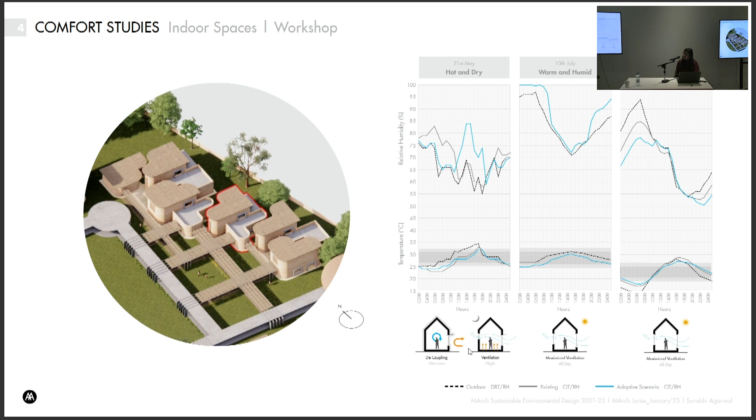Then I have a point which in fact is addressed to everybody else as well, which is about comfort hours. So in all the presentations, this percentage was given. It was a percentage that was always lower than 100. So therefore, there were hours that were not comfortable, and well, we've never discussed them. So how uncomfortable were they? How long did not comfortable last for? I mean, these are the crucial questions.

Not necessarily the comfort hours, but the discomfort hours. It could be that a project is stopped and not continued because it looks like the comfort hours are not that great. But it could also be at the same time when you analyze the discomfort hours that they were not so bad. And I think at least a comment should be made, because it will help several of your projects that do not appear to have very good comfort hours.

Now, you have good results at the end, something like 80%. But again, what's the other 20% doing? When is it happening? For how long is it happening? Whom is it affecting? Is that a problem? Can it be improved? In order for it to be improved, we need to know more about it. So these are my comments.

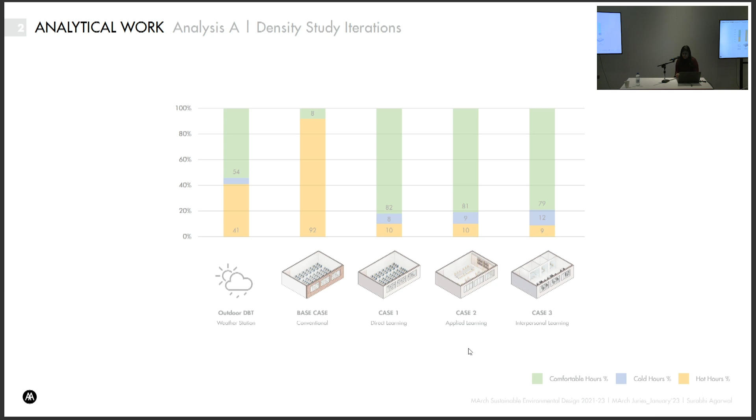In fact, the comment that I made about the surprise between the outcome and the input towards it, I think does need an explanation. Maybe you can say something about this. So the idea was to evolve from what I established from the space that I was analyzing, which was a 12:8. So these were the initial boxes that I took, which are the same spaces that I initially analyzed.

I'm asking the question why start with this, because by definition, a space 12:8 of a certain height, well, I think we took it to be quite high for large volume, single-sided openings will have a passive zone that will not be very good. You have freedom of starting point. Why on earth start with this? I mean, I can't, you know. So for this, sorry, okay.

Thank you, Surabhi. I was about to say the same comments as Simos about the comfort hours, although at the end you showed comfort hours and temperatures. At the beginning, you were only showing the comfort hours, and I agree that that's not the best way to approach, especially in this climate, with the materials you're using, which include a lot of thermal mass, because the difference of the temperature outside what you defined as the upper comfort limit may be low or may be high, and this we can't see.

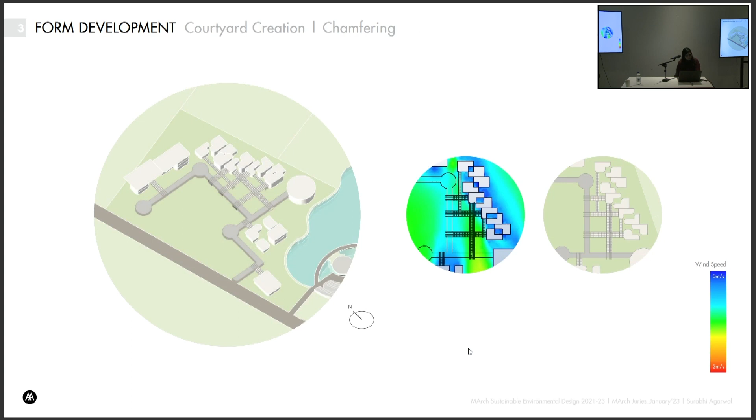Just wrapping up a bit quickly, in addition to what was commented, I would like to add a few things. One is about the form development. That has to do with the discussion of the classroom as well, where you have the 3 different types of learning spaces. And it occurred to me just today, when you showed these different ways of starting the form development, that in a way, all of them benefit from transitional spaces, balconies, courtyard.

And then I was wondering why the more direct learning has to be more formally organized. Maybe the best way of presenting them is establishing this relationship with the outside, the possibility of spilling out, and the relationship with the different kinds of outside spaces that you nicely created a hierarchy. So that was one point.

Then right in the end, when you talk about thermal delight, you mentioned the temperatures. That was very clear, but there are some other variables for thermal comfort and delight. You know, the surface temperatures, the more or less wind, definitely these two, and even maybe being in the shade, or in the sun, or in partial shade.

So if you can, and you have this data from your simulations, add more to that, you can characterize the sensory experience better. I would encourage you to do that. Otherwise, it's just temperatures, and you have these massive walls that will have very low surface temperatures, hopefully. And it would probably be a delight to be seated on this floor or touching these walls. So explore that too, as you got that far.

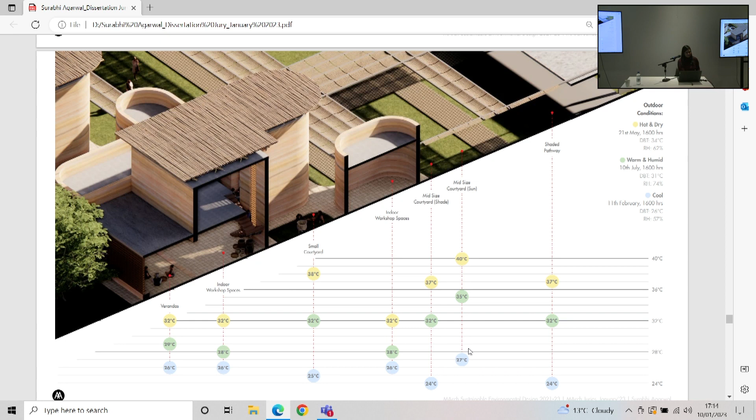There will be moments when it will be possible to have a classroom outdoors. It's not just to sit out and chill out, but actually have a learning activity outside. So maybe days where you could show that would do justice to the concept that you initiated. Of course, in addition to the clarifications that Simos was asking, and other reviewers as well. Okay. So thank you very much. I think we can move to the last presenter, but thank you, Surabhi.

Hello everyone. So my project is about marine havens, which is transforming oil platforms into habitats for climate resilience in the tropical climate. It addresses the rising sea levels and disappearing islands, which result in climate refugees, as well as the oil platforms, which are either abandoned or deployed in the deep sea. This means that the structures erected to extract oil from deep sea water have become obsolete. Structures capable of lasting for longer periods are being put down as scrap materials.

Hence, it is important to retrofit what is already in the seawater, such as oil platforms, fusing it with the current trends of a floating city with the adoption of new technologies. These platforms, owned by ONGC, which I am taking into consideration, are located on the western coast of India, which is rich in marine ecosystem with a stable sea and is currently a tourist attraction. On the other hand, marine biologists who have been studying this zone have remarked on it for various research and studies to preserve the reef.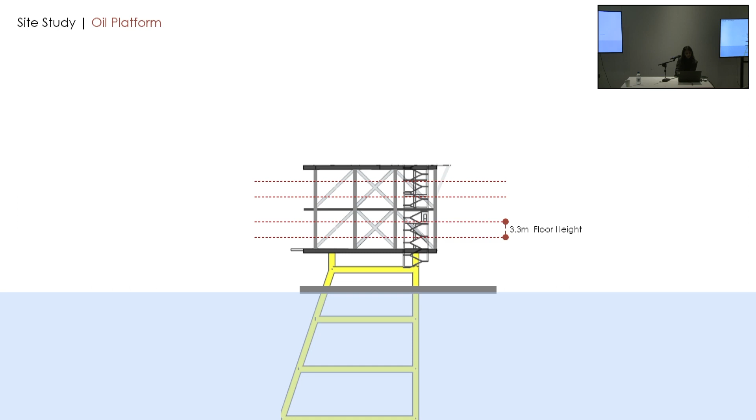So the existing ground of the platform is 100 by 35 meters, where the existing structural grid is 10 by 12 meters, and the existing floor height of the platform is 10 meters, which was to accommodate the heavy machineries. But for my proposal, I'll be adding floors in the existing platforms, achieving a floor height of 3.3 meters. The platform being narrow, to create a wider ground space, two platforms are connected 10 meters apart as one unit together.

So considering the master plan of the whole cluster to see how the unit will be collaborated with the other units, the project as a cluster is manifested through a series of platforms that can accommodate the infrastructure. Hence, more units are connected together, forming a cluster for maintaining a circular economy. The units of the cluster are further attached with bridges and through water transportation. The distances are concluded from balancing the connectivity, walkability, and preventing the wind shadows on each platform.

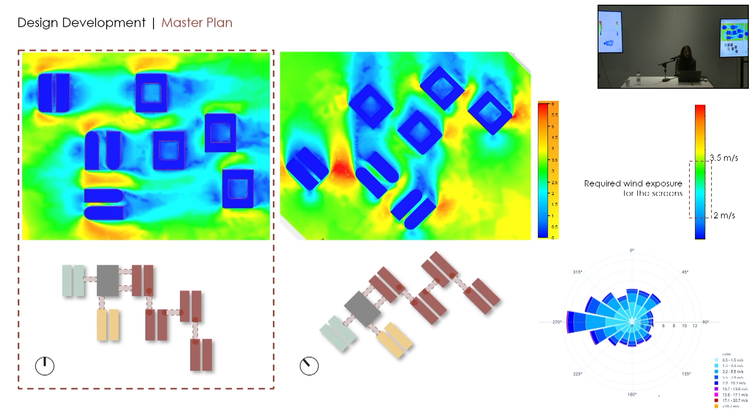These clusters could be further expandable through attaching a dock, which is called the arrival level for the cluster. And further, I simulated the cluster in two orientations, which have the potential connectivity to the port. The result shows that the cluster oriented true north received the required wind exposure, which is between 2 to 3.5 meters per second, for the screen, which I'll be adding as a barrier to cut the high wind velocities. However, for my study, I've taken the lodging unit and detailed it further with research and design.

The first step was to increase the distance between the platforms for achieving more air movement and adding the curve on either side, concluding from the aerodynamic studies. The major bifurcation of the program is into communal spaces, open spaces, private spaces, and the services along with it, which are accommodated in a singular platform. For the base conditions, the lower platform is kept for the entrance of the guests and for future sporting events related to the water. The courtyards are arranged in a form to connect the indoors and the outdoors, resulting in a better quality of spaces.

And the private spaces, which are mainly the guest bedrooms, are oriented east and west to maintain the privacy and the view to the water, whereas the communal spaces are oriented inwards to get a more unified and open envelope. So the built form is derived to achieve a lot of air movement by cross ventilation using wind-driven and stack effects. The depth of the floor is not more than 10 meters, which is the existing structural grid I have in the platform.

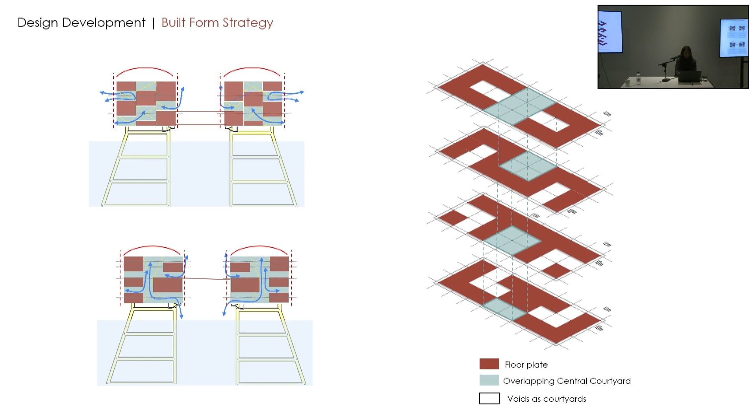As the facade receives uncomfortable winds and lots of radiation, it was essential to design a skin. Here the precedent studies have shown designing an aerodynamic shape which creates less wind force on the facade. So therefore, three screens with different perforations were tested in relation to the interior spaces and the courtyards, with the same principle as the precedents, where the screen shades and controls the wind forces.

These tests were for two major spaces, a room and a courtyard, where the result shows that screen 1 blocks a lot of radiation and also reduces the wind by a greater amount, cutting the visual connection, while screen 2 with a perforation ratio of 60% performs well with the courtyard, maintaining the wind speed, and screen 3 for the rooms. However, for the rooms, the captured wind is further controlled through the design envelopes for the individual units.

Taking it further, screen 2 with perforation ratios of 60 and 80 is to be distributed on the overall skin of the built form. So according to the aerodynamics of a ship, the built form is achieved with the north and south of the platform having the buffers which accommodate the public activities and the open terraces, and the tilt helps in shading, in addition to the screen which controls the wind movement.

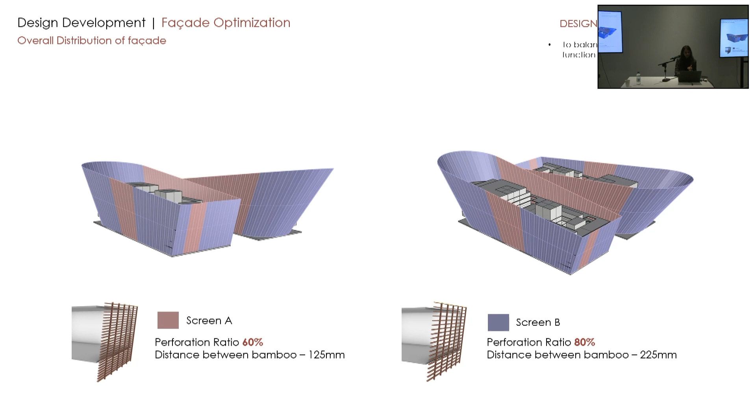The overall distribution of the screen as per the space is where screen 2 in front, which has a perforation ratio of 60%, is in front of the central courtyard, and the communal spaces between the platforms do not have a secondary skin. And to balance the form, the functions are mirrored to the adjacent platform to have a view of both land and ocean on two adjacent platforms.

So the solar analysis shows the cumulative results of incident as well as the reflected radiation from the sea with and without the screen, which shows a reduction of 20% of radiation for the southwest facade and 30% for the northeast facades.

In addition to the vertical surfaces, as the roof receives the maximum incident radiation, I designed a canopy to allow use of terraces for communal activities with a ventilated roof strategy. So here I have considered two permeabilities of the roof, which are 40 and 60%, whereas the thickness diffuses roughly about 20% of the direct radiation on the roof.

So in terms of wind, the roof is designed curved while keeping the screen high, diverting the strong winds from the north when it's facing the north, whereas when the lower angle of the adjacent platform is facing the north, the wind flows through the slope of the roof which is designed.

The units were simulated, one with the roof and the other without the roof, as a result of which the grid roof offsets from about 640 to 480 kilowatt hours per meter square in the period of high solar radiation, which is from February to May.

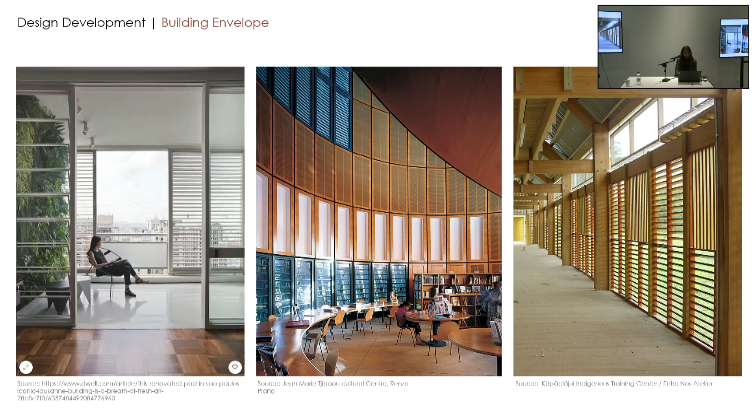So further going into the built envelope of a unit, the idea of the building envelope is to keep it adaptable and connected to the context of water while allowing good air movement through the unit. The screen, which is in front of the units with 60% of perforation, controls the wind and provides shade where the guest rooms open up into the balcony space. Further, the envelope lets occupants control the light as per their comfort and privacy levels.

So the flow of air is regulated by the adjustable louvers, which open when the wind is light to allow fresh air, but close when the wind speed picks up, which allows more adaptable and adjustable comfort levels according to the occupants.

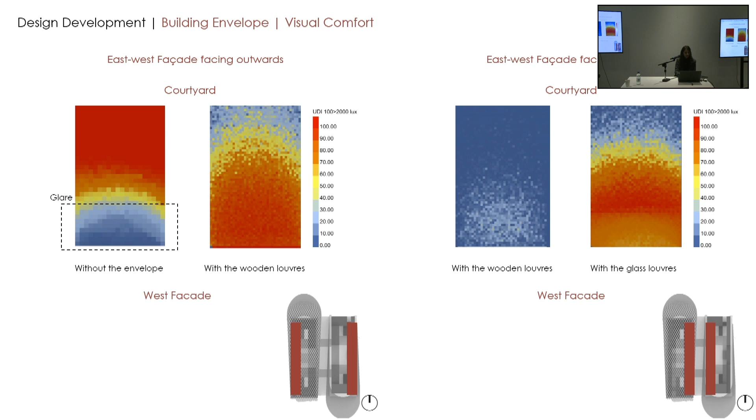For the visual comfort, the envelope with only the use of screen received more glare, which is the first simulation shown in the picture, whereas adding the adaptable louvers increases the useful daylight within the given limits, whereas the units facing inwards resulted in a low percentage of useful daylight. However, for the units facing inwards, the glass louvers showed an increase. So here I've limited the use of glass, but also achieved the required visual comfort for the units facing inwards.

So the building has a highly efficient passive ventilation system, which eliminated the need for mechanical air conditioning. The operative temperatures were examined for the 15th of March, when the radiation is at its peak. The result shows a 40% increase from the base case of typical construction to the final case of adjustable louvers and more air movement.

So the base floor of the platform has communal spaces promoting more outdoor water activities, on the decks, and for retail purposes. And this is a typical floor, the 4th floor, accommodating the guest rooms on the east and west of the orientation to maintain privacy and connection to the water views as mentioned earlier, whereas the communal spaces, which are oriented inwards, are adaptable in terms of envelope, having open spaces with only the screen in front as an envelope.

So the top floor accommodates the restaurants and cafe, and taking advantage of the height, the connection is maintained to have an aerial view of land as well as the ocean. For the outdoor spaces, which I mentioned, UTCI results show that the roof allows the usage of terraces in the evenings, that is after 5 p.m. However, during these times, shaded spaces can be in use.

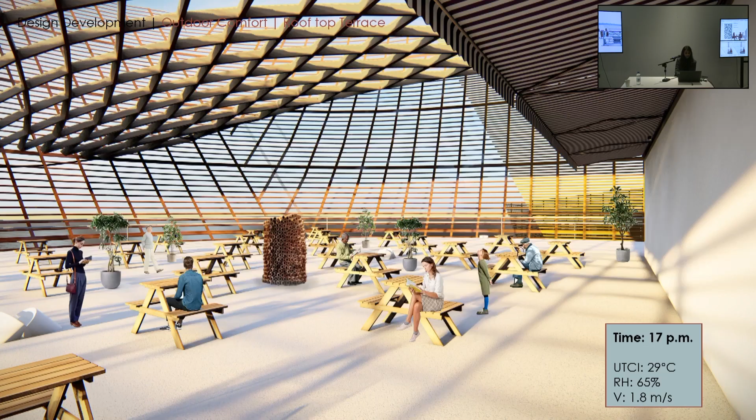So this is a view of the terrace at 5 o'clock in the evening, which achieves a temperature of 29 degrees with a wind velocity of 1.8 meters per second. With the day passing through the evening, the usage of the space changes to having the night views and a more inward connection to the water, which was mentioned earlier.

However, for the courtyards, it was observed that the courtyards were acceptable in the month of March at 12 p.m. in comparison to the terraces, whereas at the same time in June, they could only be used as outdoor transition spaces. For March, even though it traps heat, a wind velocity of 1.5 meters per second adds the required movement of air for comfort.

So, this is a view of the courtyard in the later evening. And this is also the view of the courtyard showing the connection to the outdoors. So this is a section cutting through the central courtyard, including the terraces and the outdoor spaces, where it shows that the built mass has a very clear air stratification through the courtyards and the voids.

So combining all the information explored in the project: the screen which controls the prevailing winds, the rooftop terrace acting as a major communal space, the canopy of the roof as shading, the outdoor shaded spaces, the natural ventilation, the use of solar panels which could be promoted on the roof, on the canopy which is provided, and the communal gardens which are facing north, which could be used as they're shaded for the high radiation periods.

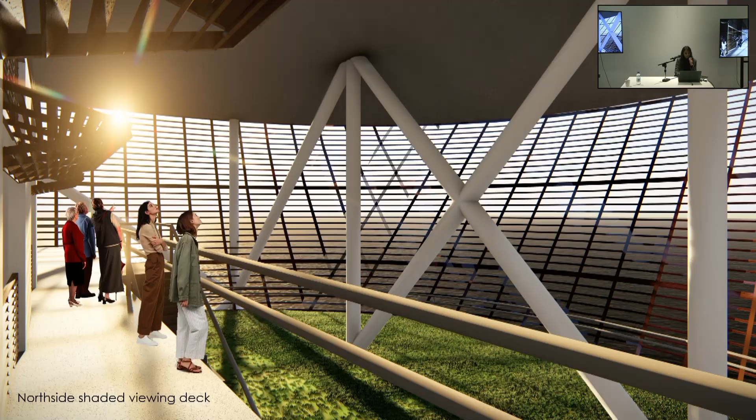So this is the north side view of the deck, which is the front of the built mass, showing it in the evening period, which promotes the outdoor use. This is the same view panned to the front of the built mass, and the north shaded viewing decks. These are all the north views on different levels.

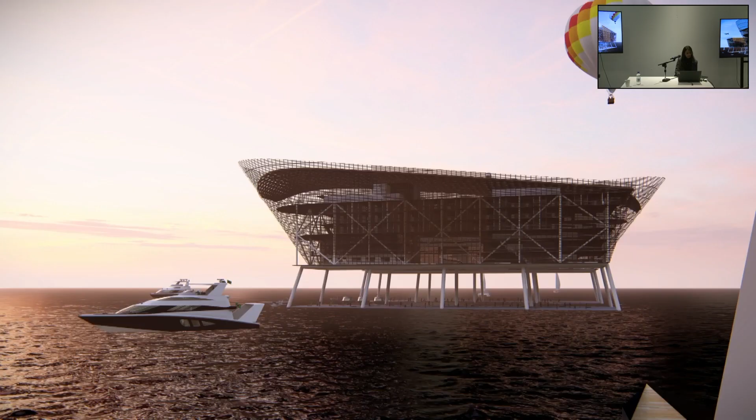And this is the south-facing communal gardens, which I talked about, which have an adaptable envelope for the indoor spaces, whereas the outdoor spaces are used more as communal gathering spaces. So to complement both the purpose of usage and the aesthetic of architectural forms on a personal level, this is the complete research and design outcome of my dissertation, and these are some more views. Yeah.

Maybe Flo, can we invite you to make some comments there on the other side of the Atlantic? Thank you, Joanna, and thank you, Zil.

I want to first congratulate you on the topic. I think it's very, very interesting, and it is needed, and it's so important that we as designers also try to address these kinds of topics that are needed, and not only something that we would just like to do. I had never thought of these kinds of structures. I think what you brought to the table is extremely interesting and complex, because your site is very difficult. It's difficult to relate to being in the middle of the ocean.

So I think that is great, and in general terms, the solution that you found of putting a screen that would be the same one in all of them is the best thing about your project. It's as if a plugin would come to any of these platforms to make it livable, and it doesn't matter what the inside hosts. Actually, I find a lot more interesting the big action of saying, to make this space livable, we need this screen, and then everything becomes livable. I find that super interesting and a really good project.

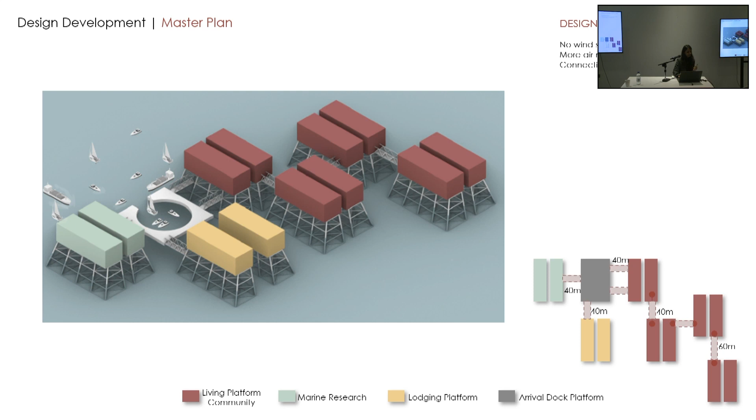Just to mention, I have these typologies listed below: the living platform for the communities, the Marine Research Institute for underwater research, and the lodging platform, which I studied and researched further to derive a strategy that could be extended to the clusters mentioned here. Okay, thank you.

Thank you, Zil. Good development and very nice presentation. Congratulations. I have one question and one comment. I like the master plan you've proposed, and I fully support that you decided to focus on one, otherwise it would be too large a project. So you focused on the lodging platform. But all your analytic work considered those two platforms isolated.

Although you did studies of the air movement from the courtyard, you relied a lot on air movement coming from the seaside. I wanted to know if you considered whether blocking, as this image shows so well, would still provide the same airspeed you are imagining. Then the other comment, well, I had actually two. In regards to the occupant, it's true that here you probably didn't develop it a lot because of time constraints.

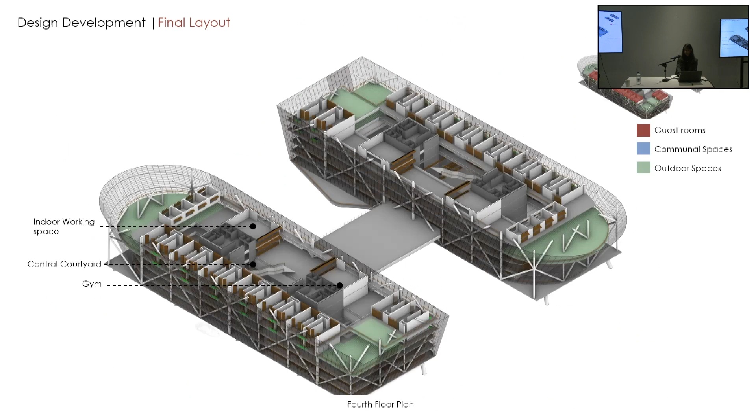Well done, Zil. Great development since a few days ago. I noted here the following, you can quote if you wish. These are floating structures that are made to look like a building that looks like a boat. And perhaps it is because of that there is a bit of confusion in our minds about how to treat them, as a boat, as a building, as some new hybrid. So it's a very interesting and very imaginative scheme. And you've done a great job.

The only problem that I had with some of these spaces, which I think you have explored quite well, is that they are huge, yet they feel a bit claustrophobic. I think the screen has taken over and covered everything very conveniently. Well, now you need to see how one can escape. Because you see these people there, they turn round and round. Then when we go to the edges, let's see.

Okay, I mean, this is an amazing image, which I think becomes quite evocative and iconic, and you can sell this. But when we enter the major spaces, it appears like there is a lot of wasted space, and I think that may need some further reflection. But anyhow, that does not detract from the fact that you have created a very interesting scheme. Well done. Thank you.